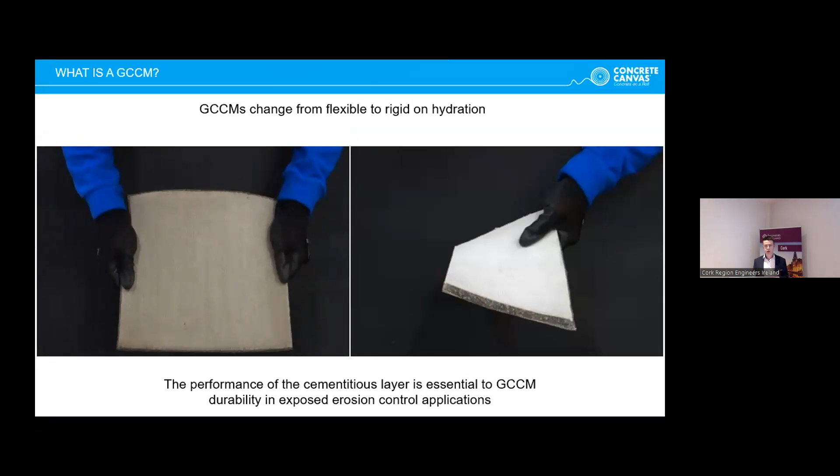But I thought I'd start the presentation off with an introduction into what is a GCCM. A GCCM stands for a Geosynthetic Cementitious Composite Mat, or concrete on a roll. It's quite a unique geosynthetic material where its physical properties change from flexible in its prehydrated state to rigid upon hydration. So the following slide is just a quick illustration of how the material performs both in its prehydrated state, as you can see on the screen here in front of you. So it does change from that flexible state to rigid after you hydrate it, and the performance of the cementitious layer is essential to GCCM durability in exposed erosion control applications.

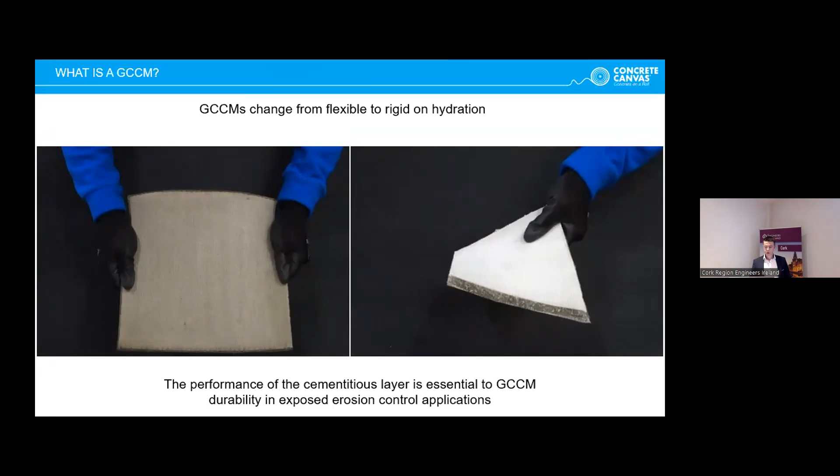There's 4 different elements to a concrete canvas GCCM material. Essentially it's defined as a flexible concrete-filled geosynthetic product that hardens on hydration to form a thin, durable, fiber-reinforced concrete layer. The 4 elements include the polyester hydrophilic top surface, a reinforcing fiber matrix that runs through the material, a dry concrete mix within the material itself, and finally a water-impermeable PVC back membrane. We'll go through each one in further detail shortly.

Just to let everyone know that it's designed for your non-structural erosion control applications, and it's certified by the British Board of Agrément for a durability lifespan in excess of 120 years for your erosion control and weed suppression applications. So there's a long-term durability within the material.

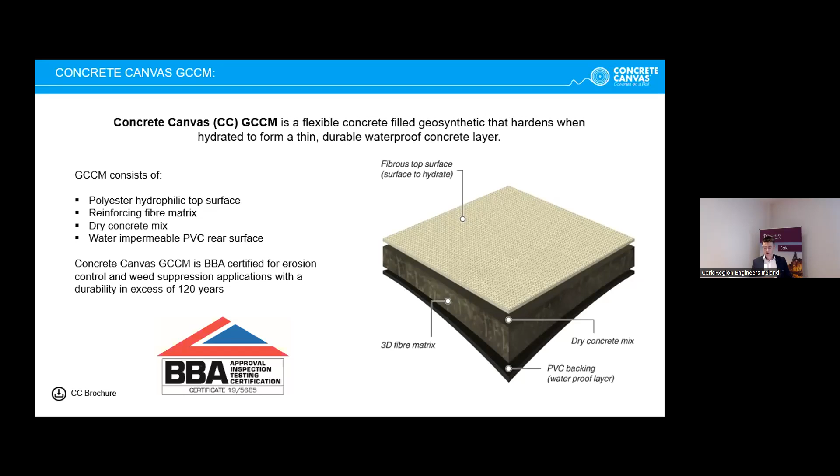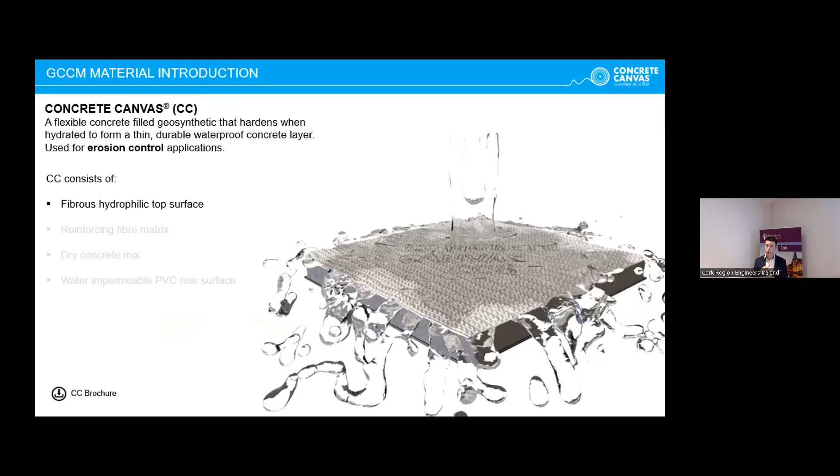So I mentioned the top surface is your fibrous top surface. In the field, this acts hydrophilically. This is the section of concrete canvas that you should hydrate in the field. It wicks in the water very, very quickly, but it's also tight enough to contain the dust and the cementitious fill within the material. So there's a very low washout rate, less than 3% within the GCCM material.

The second component is the 3-dimensional fiber matrix. These synthetic fibers, as you'll see in the slide here, run in a Z fashion through the material, and they're a very important element of a GCCM product. They perform 3 different functions. Firstly, they prevent dislocation of the cement fines. So even if you hang this material on a vertical plane, perhaps for protecting the slope, it still maintains its uniform density. It also prevents any crack propagation after the material has set in the field. And thirdly, it contributes to the ultimate tensile strength of the material as well.

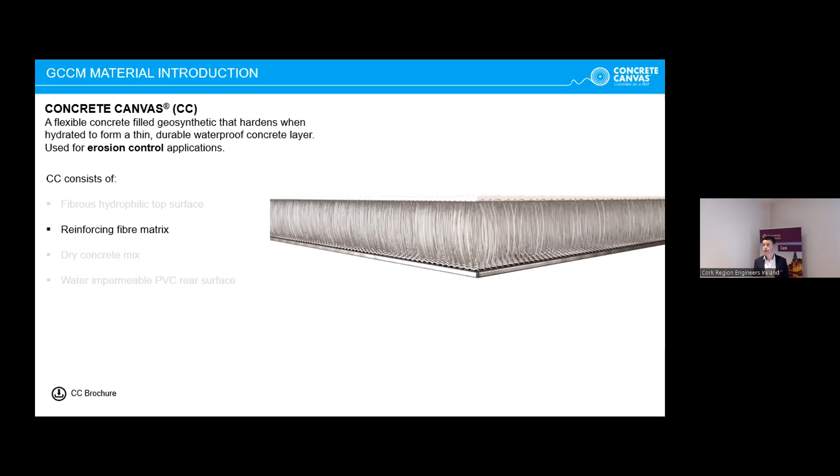An important component. The third element is the actual dry cementitious powder mix itself, which has a very high early strength gain. It gains 80% strength within 24 hours, and it has a 28-day compressive strength of 60 MPa for the middle thickness or type 2 material.

And then finally, on the bottom, we have a PVC rear face, which is your geosynthetic component, and everything in the GCCM, the concrete cementitious component, is designed to protect this from any damage in the field. So that is your back component that should be protected by your overlying concrete material.

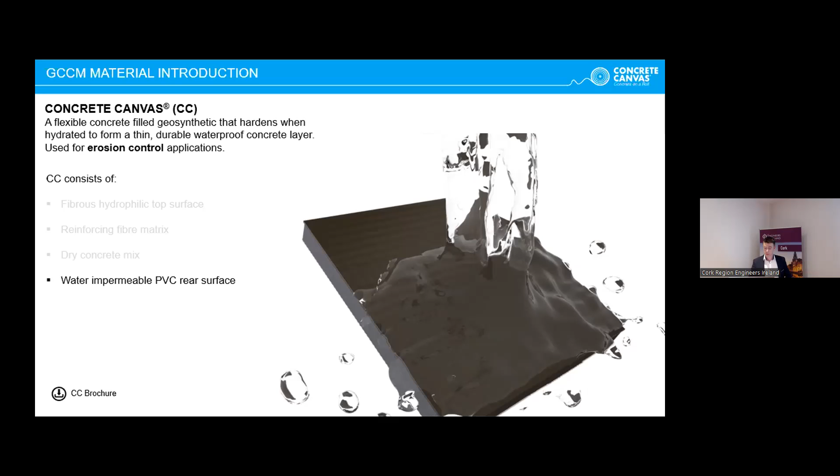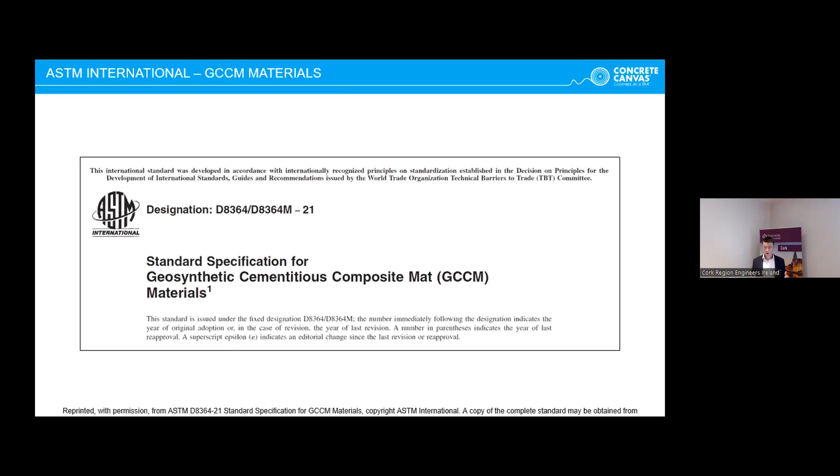GCCMs might be a new term for some people, but it's recognized by the ASTM International Standards Organization. There's now a number of GCCM specific standards covering this class of construction material, from material sampling, testing and installation. But the most important standard, particularly for designers working on civil projects for erosion control needs, is ASTM D8364, the standard specification for GCCMs. There's further details on that standard coming up.

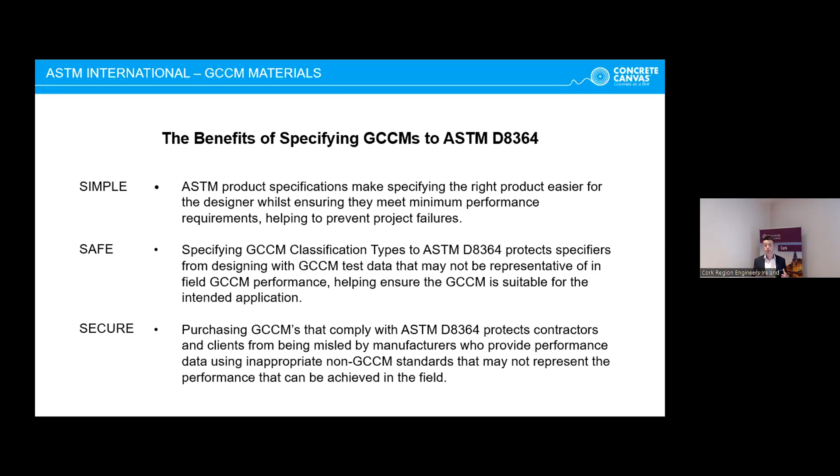Overall, the benefits of specifying GCCMs to ASTM D8364 for designers: a really simple process, detailed, simple, safe, and secure. This means that if you're designing a project to the relevant ASTM standard, you're ensuring you're specifying the right product and meeting the minimum performance requirements. In terms of in-service performance in the field, it's safe, with relevant data and testing. And secure means the contractor knows they're procuring the correct material in the market. It's a really good way for QC for designers on projects.

In terms of the core application areas for the materials, there's 4 key application areas: watercourses, slopes, weed suppression, and containment structures. In the presentation today, I'm going to focus mostly on watercourses, slopes, and weed suppression, but keep in mind that all of these different applications can be used and designed with GCCMs.

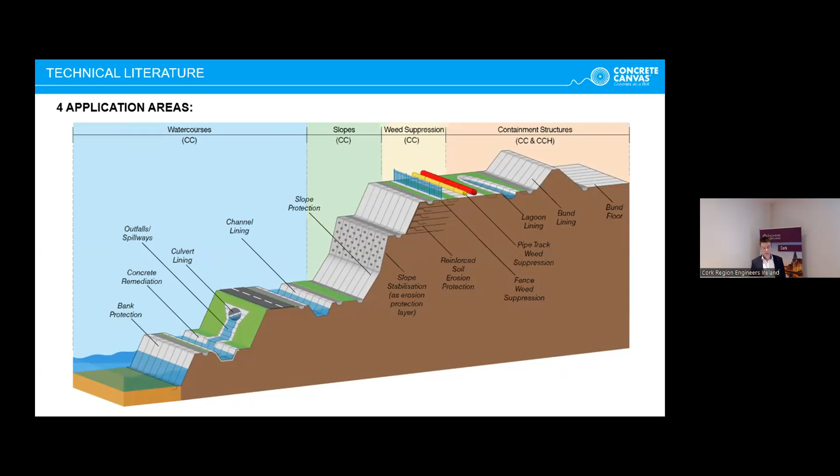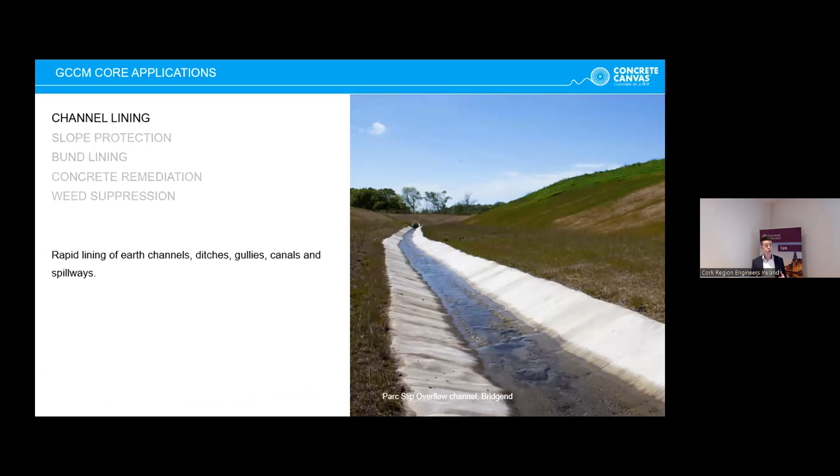In terms of the actual core applications, the first is channel lining. This involves the rapid lining of channels, ditches, gullies, spillways, and canals. The GCCM material tends to be very quick to install, up to 10 times quicker than traditional hard armor solutions such as poured concrete. There are other applications such as slope protection.

Keep in mind that GCCM is designed to prevent further weathering of a slope and further erosion. It's not for slope stabilization. However, it can be used in conjunction with soil anchors and a wire mesh to give it that stabilizing effect.

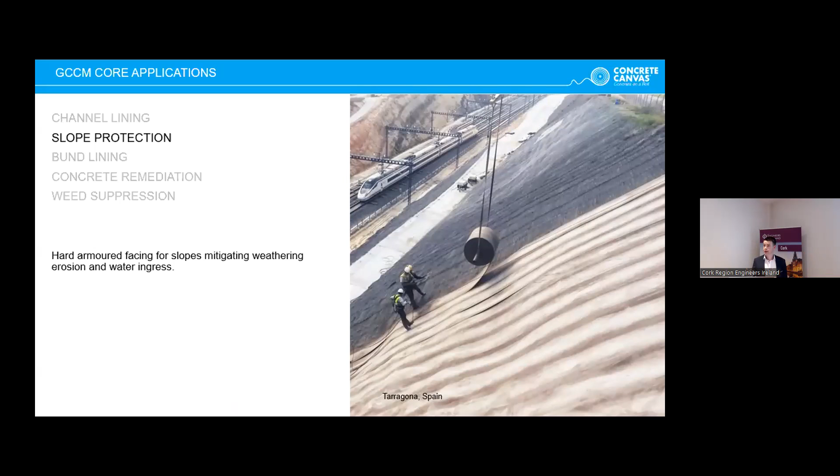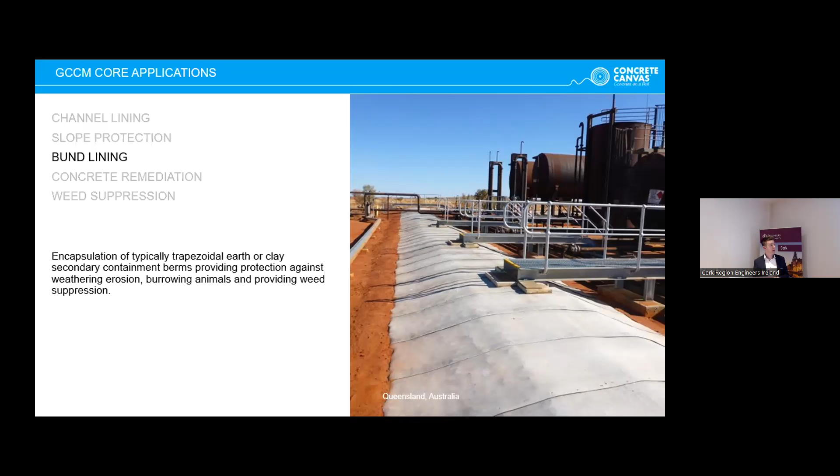The third application is bund lining, which typically involves the encapsulation of a trapezoidal earth bund, providing protection against burrowing animals, perhaps for containment on certain applications in the petrochemical sector, and ultimately for weed suppression on different plants.

Concrete remediation is also a popular application of GCCMs. Typically, clients have existing assets coming to the end of their design life and wish to prolong that design life using a GCCM. The material can be put into service within 24 hours because of the high early strength gain concrete used, and it has a very thin footprint, which allows them to preserve volume capacity within a flume or a watercourse.

And finally, it can be used for weed suppression, typically underneath security perimeter fencing, underneath access points in the rail and road sectors, or for line of sight crossings in different areas in the rail sector as well.

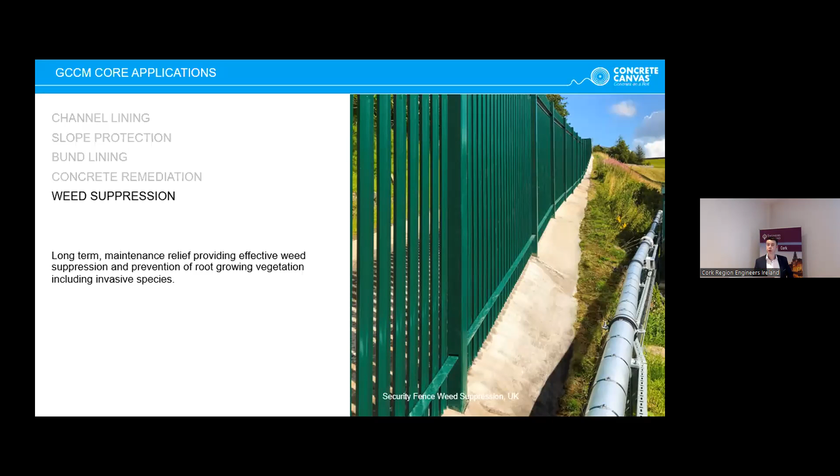We'll have some case studies later in the presentation going through some of those applications, but keep in mind it's quite a versatile material, GCCM, and it can be used for alternative applications such as culvert repair and gabion reinforcement. There are other applications out there in the market too.

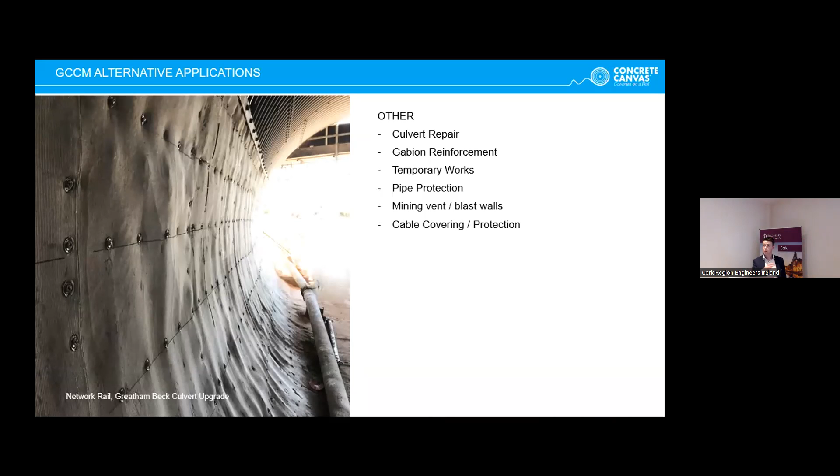They weigh up to 70 kilograms per roll, and need a 2-person lift for each roll. You can simply install it with hand tools and a water source. You don't need heavy plant to install the batch rolls.

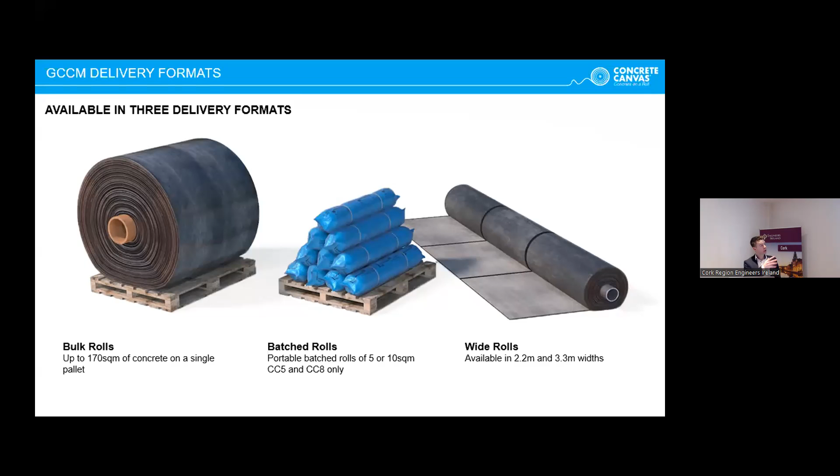Finally, we have our wide rolls on the right-hand side, available up to 3.3 meters wide. Keep in mind, the wide roll is ideal where you have a straight uniform channel of constant profile, or a larger project or slope where you want to minimize the amount of joints required in the field. But again, for the wide rolls, similar to the bulk rolls, you do need good access and heavy plant for deployment.

All formats are delivered in the same fashion, palletized and in shrink-wrapped plastic packaging, as you can see in the photograph here. The shelf life for a GCCM is 2 years from manufacture, simply because of the cementitious build within the material. Keep in mind, if a contractor is storing this outdoors before installing the material, we typically recommend putting additional tarpaulins over it to keep water out.

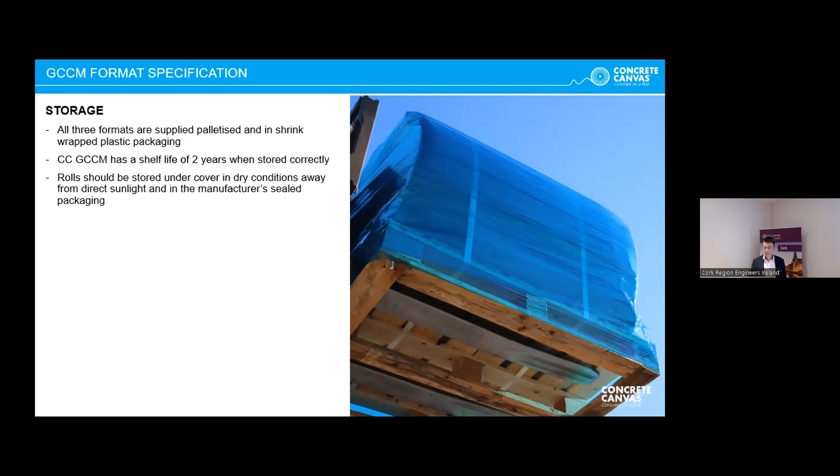So you can see the bulk roll in action on the left-hand side with the spreader beam being deployed from an excavator on site. In terms of physical properties of the material, there are 3 different strength classes for a GCCM: Type 1, Type 2, and Type 3. You can see here the thicknesses change depending on the type - 5 millimeter, 7 millimeter, and 11 millimeter. Keep in mind that the size of the rolls will get smaller as the material gets thicker, simply to keep it within the weight range for deployment.

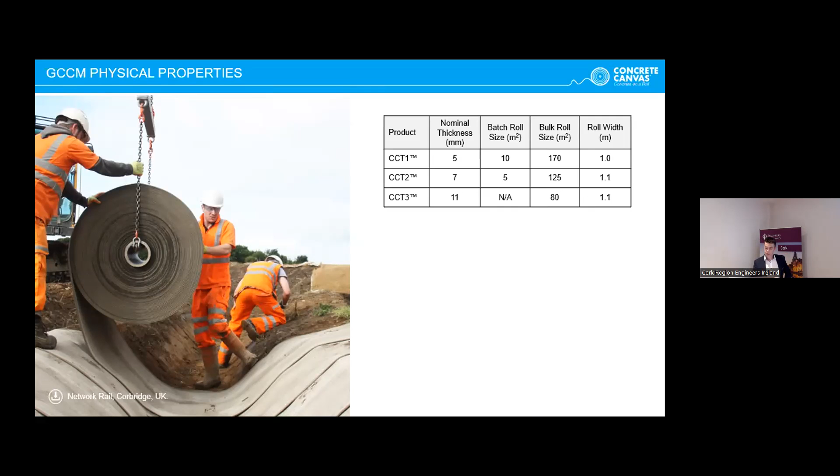In terms of classification of GCCM materials by application, as I said, we have 3 different types. Type 1 is the 5 millimeter thickness, and this is typically used where you have low shear stress and low velocity applications with limited traffic - the likes of slope applications, as you can see in the photograph here, but also weed suppression, berm protection, and the remediation of concrete hydraulic structures.

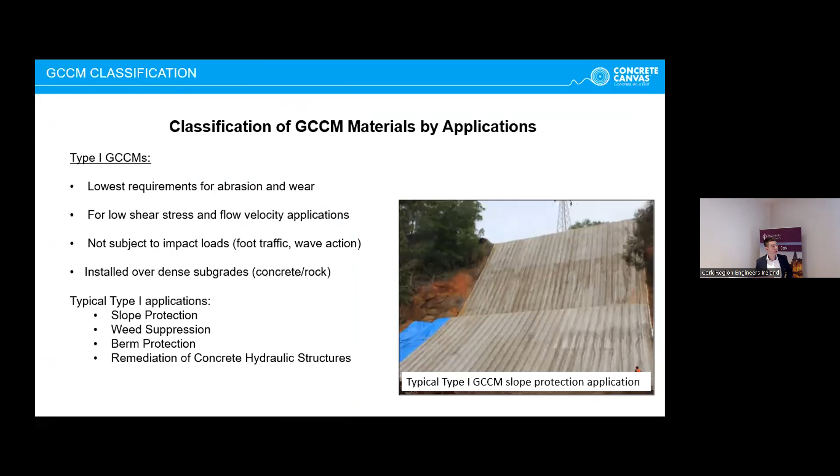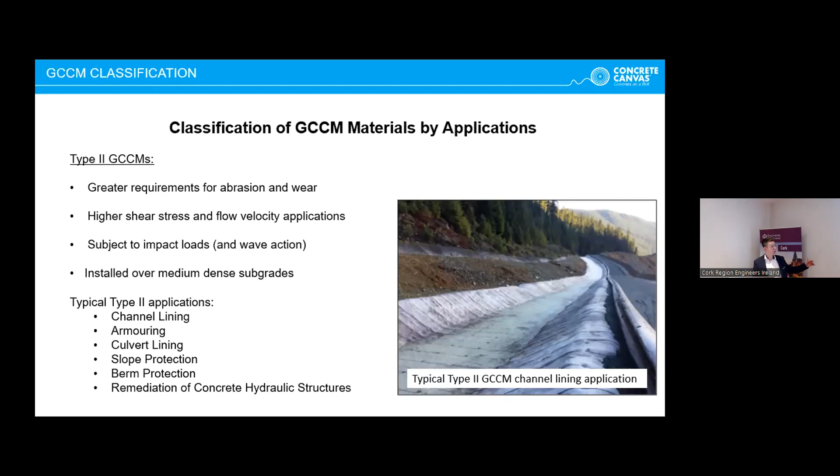For the Type 2 material, this is typically used for hydraulic applications. As you can see from the photograph here, for the likes of water courses, we'd recommend the Type 2. It can handle higher shear stress and flow velocity applications, and this can include everything from channel lining, culvert lining, and berm protection, depending on the project.

Then there's Type 3, which is 11 millimeters thick. Again, this can be used for similar applications, but perhaps you have a looser subgrade or higher abrasion or wear requirements on a particular project. Type 3 bulk rolls tend to be slightly less, at 80 square meters per roll, but you have your 11 millimeters thickness per roll.

I mentioned at the start that a GCCM is quite a unique product where the actual physical properties change from flexible to rigid on hydration, and the data sheet reflects this. So you can see here in the preset concrete canvas property data sheet, it covers everything from thickness and roll size, which we've just gone through. But if you look at the bottom of the screen, there's also the savings in terms of embodied CO2 using GCCMs compared with traditional concrete, which we'll go through shortly, and also the working time from hydration, which is 1 to 2 hours.

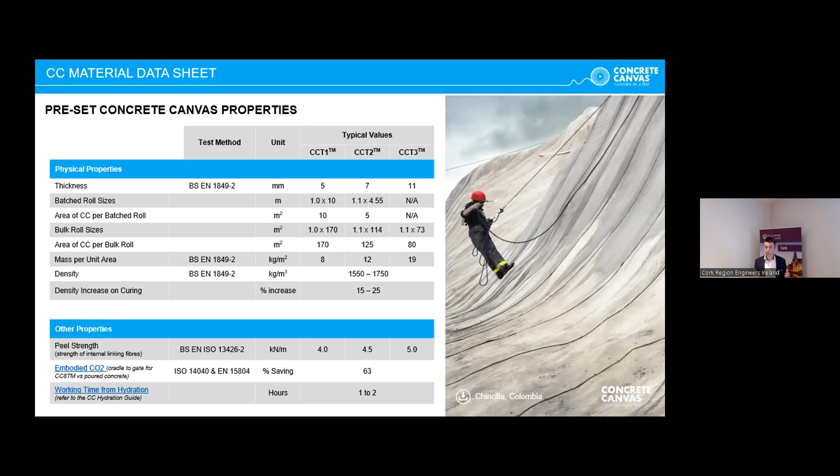That's a key thing to keep in mind, particularly with our climate in Ireland, where it's usually raining when you're installing this material on site. There is that working time of 1 to 2 hours before the material begins to set, so typically there are no delays due to rainfall.

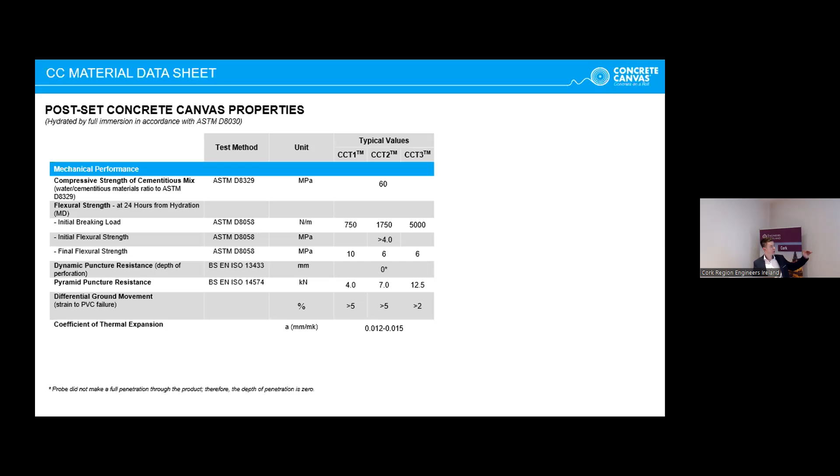This leads us into the British Board of Agrément durability certificate I mentioned at the start. The durability lifespan of this type of material is 120 years for exposed erosion control applications. That's downloadable online, but some of the factors they assess are the durability, climatic performance, and structural performance of the material for a range of erosion control and weed suppression applications.

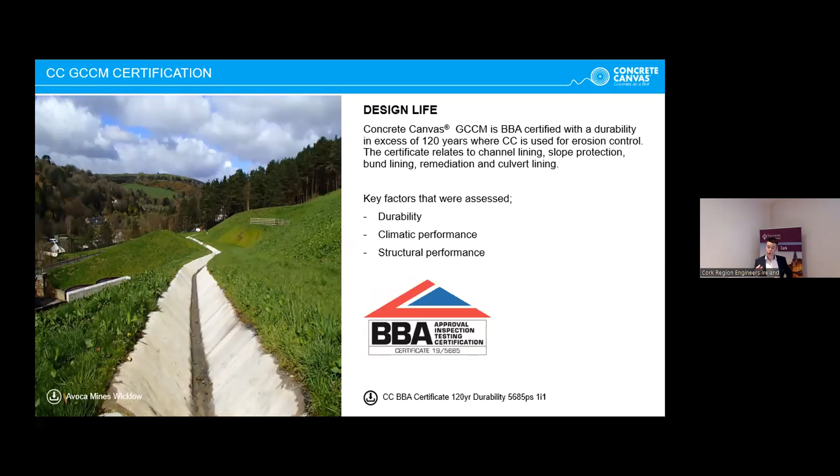Before I finish off on some of the technical literature of the GCCM and move into some case studies in the region, I thought I'd give a quick snapshot of some of the reasons GCCMs can be designed and specified on projects.

As I mentioned at the start, it's quick to install, up to 10 times quicker than conventional concrete, but also keep in mind it's quicker to commission. Because it gains 80% strength within 24 hours, you can typically put that asset back into service within 24 hours. There's also lower project costs, both from a material standpoint and from the speed of installation and the savings associated with that, and it can be installed under adverse weather conditions.

The durability, as I mentioned, is in excess of 120 years, and the abrasion resistance of the material in hydraulic applications is similar to 70 MPa concrete. Also keep in mind the reduced carbon footprint of the material.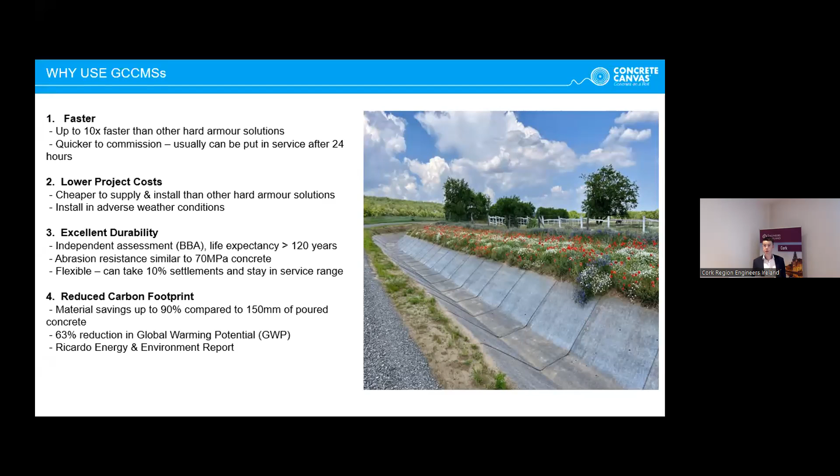For a lot of applications such as channel lining, interceptor channel lining, or ditch lining, concrete canvas GCCMs will replace up to 150 millimeters of poured or precast concrete. So right away, if you're using the 7 millimeter thickness of GCCM, you have 90% material savings. That associates with a 63% reduction in the embodied carbon or global warming potential using this material. We'll have a couple of slides coming up on that.

There was an independent report recently released from Ricardo Energy and Environment, which we'll go through shortly. Keep in mind that a GCCM product has a very low alkaline reserve and a very low washout rate, so typically it doesn't affect the pH levels in the water once you've installed and hydrated the material. For that reason, it's been approved by the EPA, the Environment Agency, and in this slide, the Natural Resources Wales in the UK, where they directly installed the material for this salmon hatchery plant for ditch lining.

You'll notice on this slide that there's algae and moss buildup on that hydrophilic top surface. So while it's still preventing any root-growing vegetation coming through the material, it will have a buildup and mossing effect, so it will blend in better over the long term.

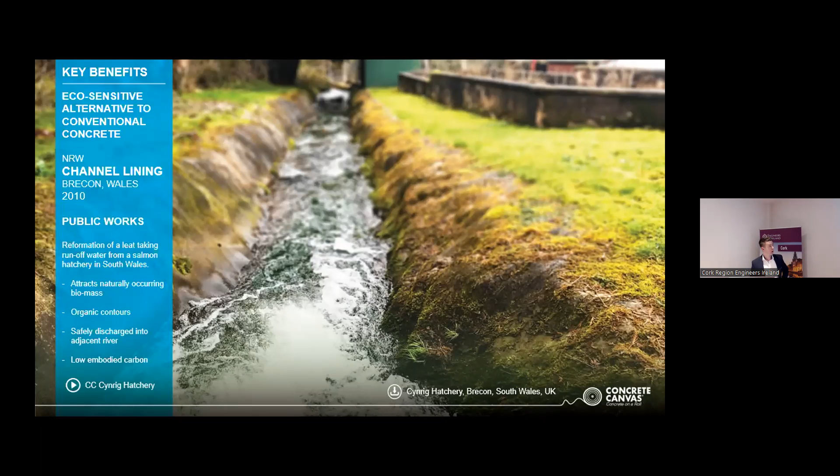Again, in terms of the life cycle assessment of the material, Ricardo Energy in their report ran this LCA, and basically, for people who aren't familiar, it does a cradle to grave assessment. It includes everything from sourcing your raw materials to manufacture, transportation, installation, and end of life.

When they ran the report, they found that the global warming potential of a GCCM product type 2 is 63% lower than 150 millimeters of poured concrete. You can see on the table on the right-hand side all the different points they've taken into consideration. This is a really useful tool for a lot of the designers looking to work with GCCMs.

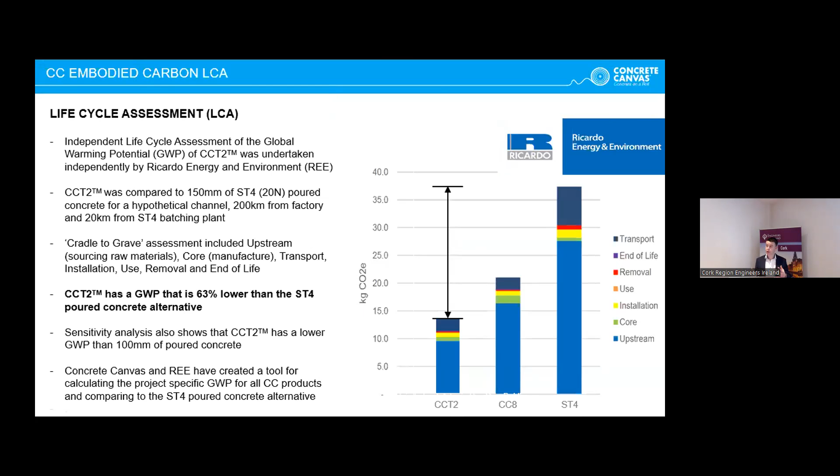Part of the report was also an interactive carbon tool. You'll see on this slide on the top left-hand side, the carbon tool allows designers or clients to input all the data for a particular scheme or project, and it can compare a GCCM product with an incumbent poured concrete or hard armor lining solution, and it can actually factor in what the exact carbon savings is on a particular scheme.

A key thing to this is obviously location of the project. You can see on this particular scheme from Birmingham and Spaghetti Junction, which was a Network Rail and National Highways scheme headed up by the Environment Agency, they replaced the incumbent solution, which was 150 millimeters of poured concrete, with a type 2 GCCM specification. On this particular scheme, there's a 66% reduction in the global warming potential. That's just an example of where the tool can be used.

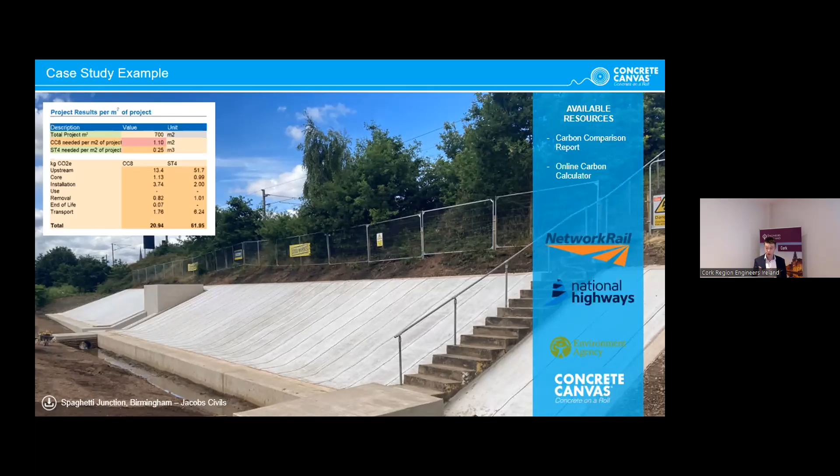We all encourage that it is used on schemes in the UK and Ireland.

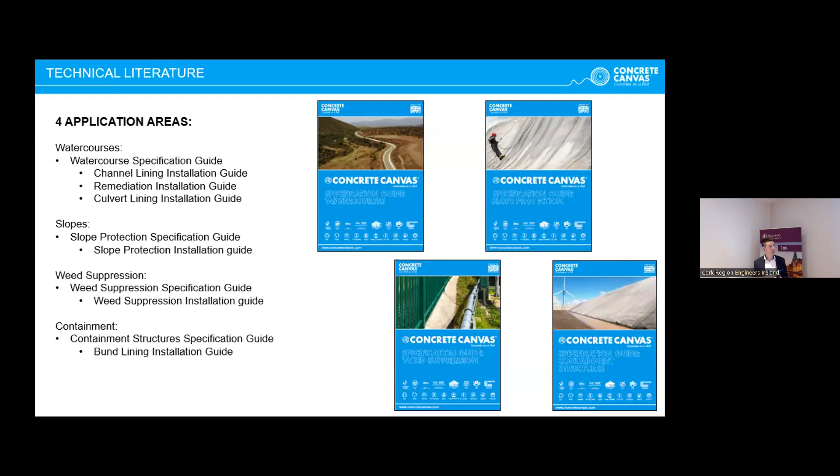In terms of the application areas for GCCMs, I mentioned earlier we have our watercourse specification guides, slope protection specification guides, weed suppression and containment specification guides. This is a really useful tool for designers when they're trying to incorporate all the important data into one of their designs. To simplify this, the next slide shows 4 key installation principles for a GCCM product. This is something that should always be taken into consideration when designing a project with a GCCM, and should also be taken into consideration by the contractor installing the material in the field.

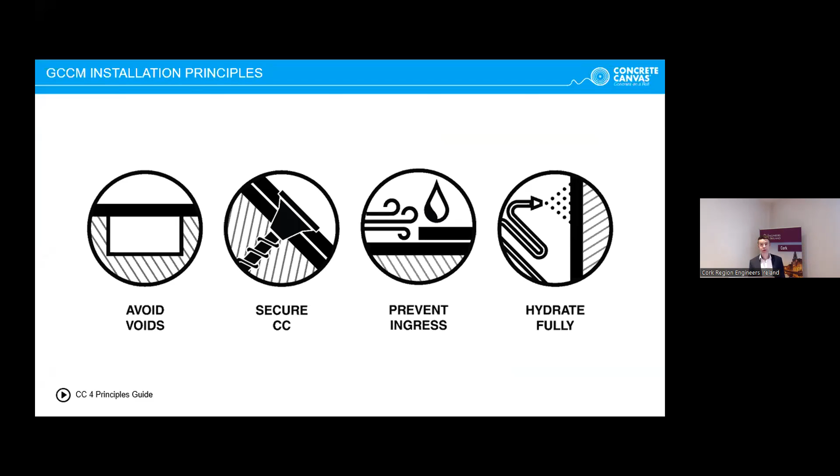The first key installation principle is to avoid voids. This typically means laying the material onto a geotechnically stable substrate. As you can see in the photograph here, that means it's relatively smooth and uniform, free of any sharp rock or protrusions, which should be removed prior to laying the GCCM product. On some projects, we'll also recommend a geotextile, depending on the project. Keep in mind that's a key consideration before you lay the material.

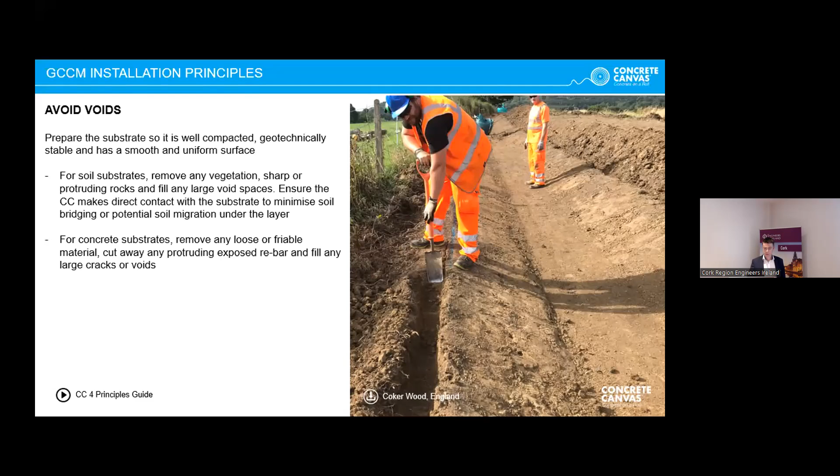The second installation principle is securing the material together. Typically, we recommend overlapping the layers by 100 millimeters, shingled in the direction of water flow, as you can see in the cross section on the left-hand side, and mechanically fixing the joints together at 200 millimeter centers with 30 millimeter stainless steel screws. This gives you a high mechanical strength joint, but at the same time allows water from underneath to drain out through the joints if there's a high water table, preventing hydrostatic uplift pressure. So that's a really good joint detail.

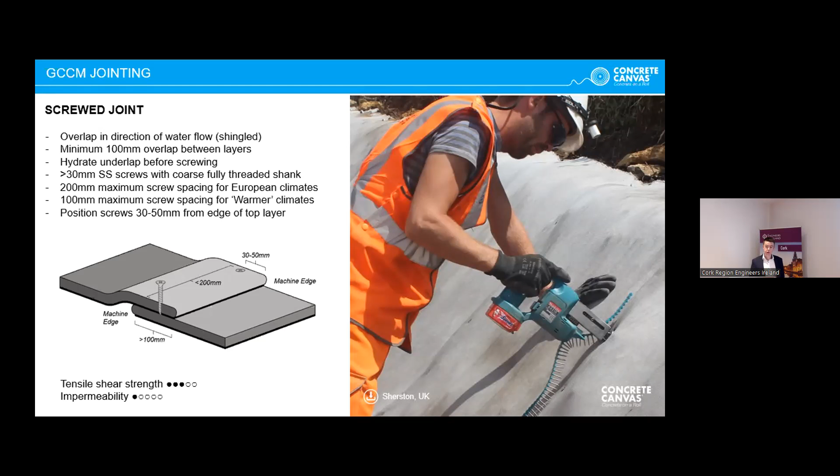The screw should be 30 to 50 millimeters from the edge. You can see on the right-hand side here, typically an auto-fed screw gun is used in the field to apply the screws quite quickly.

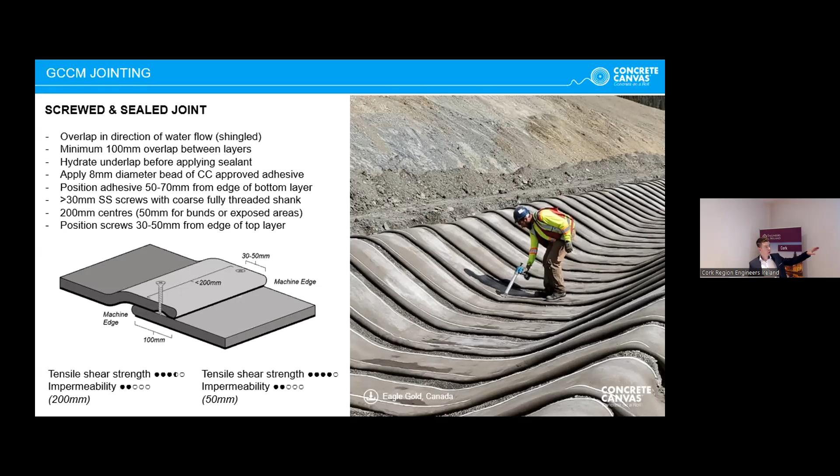If a high water table isn't an issue on site, and if you want to improve the impermeability of the joint, you can add a sealant underneath the overlap. Typically the sealant is applied, as you can see in the photograph here, 50 to 70 millimeters from the edge. After it's been hydrated underneath, you flip over the top layer and screw through that sealant, which bonds around your screw. That will still give you a high mechanical strength joint, but also improve the impermeability of the joint in the field.

In terms of edge fixings, which is also a key consideration, to join the material to the substrate it's typically recommended to use 250 millimeter galvanized pegs, as you'll see in the top right-hand photograph. This is pegged through each overlap within an anchor trench, which can then be backfilled after it's been hydrated. You can see on the left-hand side some of the design features: the anchor trench should be a minimum of 150 millimeters in depth, and should always be backfilled with non-erodible material. That may depend on whether there's a flow of water over the anchor trench — it may be a poured concrete backfill, or simply site-won material, depending on the flow.

There also might be a requirement for intermediate fixings, depending on whether there are high hydraulic shear loads within a channel. This is a project I worked on 8 or 9 years ago in Canada, at Myra Falls, where they used earth percussion anchors at 1 meter intervals because of the high shear loads within the channel. This project was designed to handle flow velocities in excess of 20 meters per second. So intermediate fixings are typically only required when you have high shear loads within the channel itself.

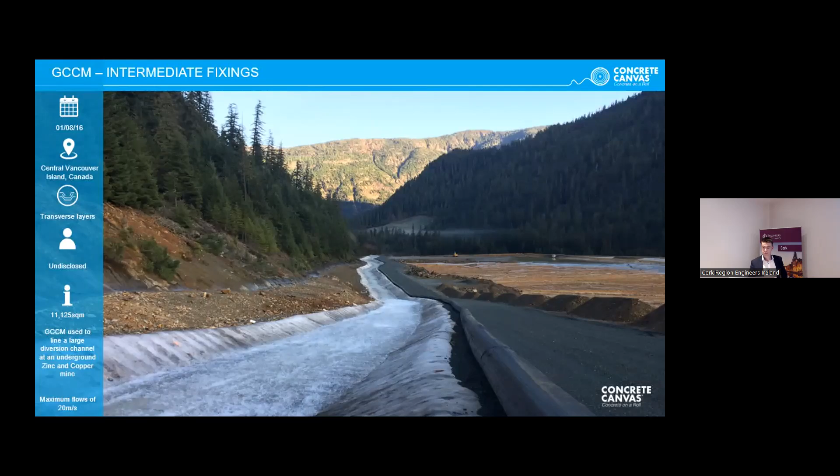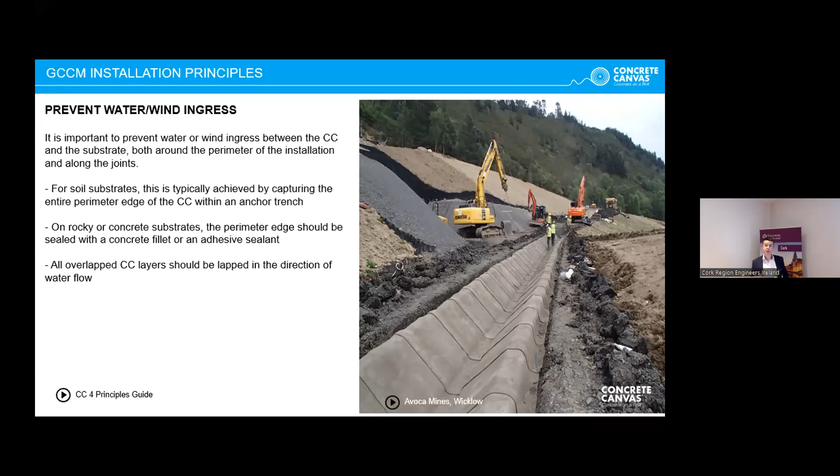The third installation principle is preventing water or wind ingress around the perimeter of a GCCM installation. On the right-hand side is a project from the Avoca mines in Wicklow, where they dug a 250 millimeter anchor trench prior to backfilling with non-erodible material. This is a key consideration for any design, because you don't want any water or wind getting underneath an installation. The leading and trailing edges are typically installed into an anchor trench and backfilled with poured concrete to prevent any ingress.

The final installation principle, probably the most obvious, is to actively hydrate the material at the end of each day. A GCCM cannot be overhydrated — you can use an excess of water, since we control the water-cement ratio within the material itself. However, you typically require half the weight of the material in terms of the volume of water. In this photograph from a road scheme in the UK, they were using a type 2 GCCM, which weighs 12 kilograms per square meter, so you'll need approximately 6 liters of water per square meter. If conditions or temperatures are above 25 degrees Celsius, you may need more water, or may need to rehydrate an hour later. However, in Ireland, we typically don't have those conditions in the field.

A key thing is to remember to actively hydrate it at the end of each day. From the contractor's perspective, they should always allow a couple of hours at the end of each day to make sure they actively hydrate it.

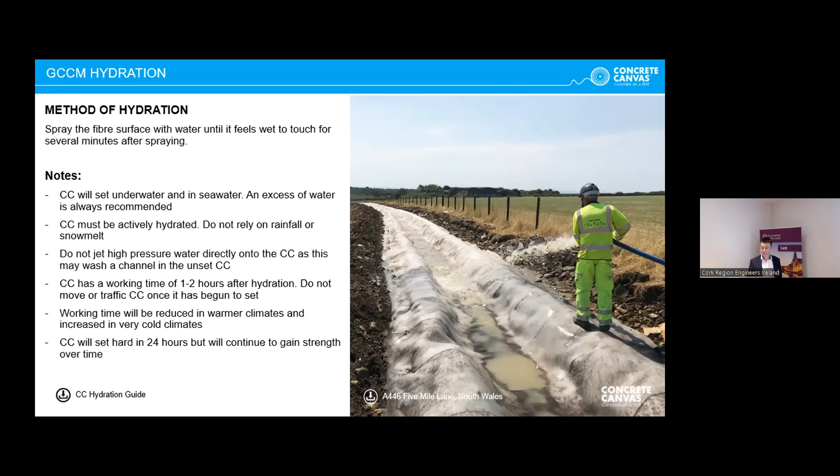That leads us to the end of some of the technical details of a GCCM product. I thought I'd spend the last half of the presentation going through some case studies locally here from the south and southwest of Ireland. I mentioned at the start that watercourses and channel lining is a core application for GCCM, so most of the focus is on this type of application.

I thought I'd start with the most local project in Cork, the recently opened Macroom bypass. It's a €250 million scheme, the Macroom to Ballyvourney works. Concrete canvas GCCM was specified by Barry Transportation on this scheme for one of the watercourses being diverted during the works, and it was installed by the John Craddock and Jons Civil joint venture.

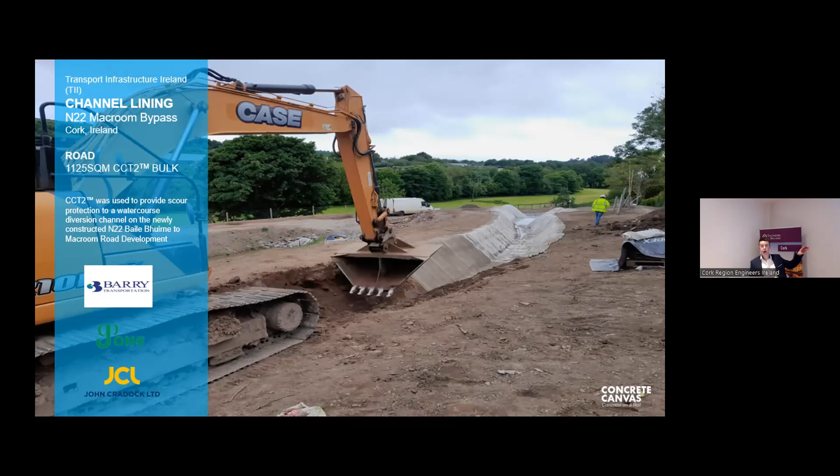They specified a type 2 GCCM for this scheme on quite a steep one-to-one side slope in the watercourse channel. It had a 1 meter base, and you can see the steepness of the side slopes. There was also significant curvature within the channel itself.

For that reason, we recommended a transverse layup in this scheme, overlapping the layers by 100 millimeters in the direction of flow. A transverse layup allows you to accommodate any curvature or pipe protrusions or inlet drainage pipes, and you'll see some of the photographs coming up on that.

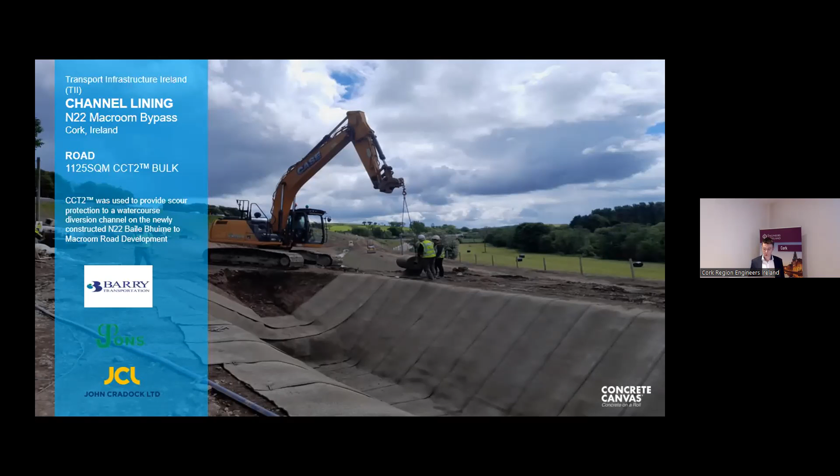They used the bulk rolls, as you can see in this photograph, with a spreader beam deployed from a 13-ton excavator. There were a few steps within the watercourse itself to dissipate some of the water energy as it moved downstream. This gives you a good idea of how steep that side slope is, and the 1 meter base within the invert.

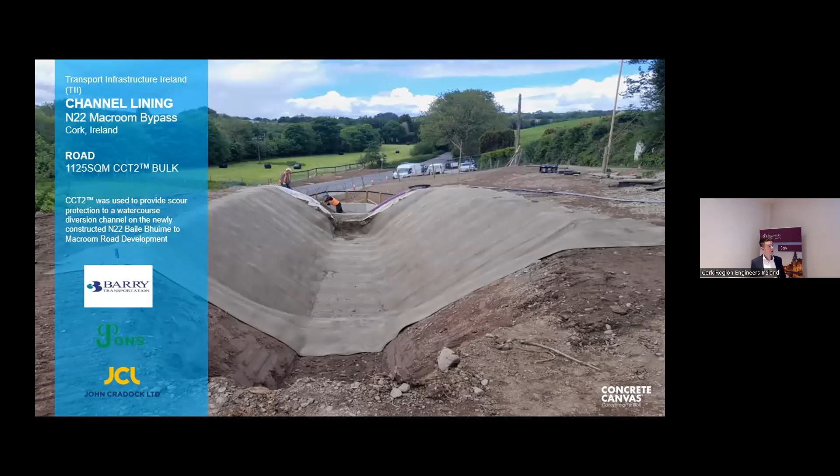All the material was laid out prior to fixing it to the substrate with 250 millimeter galvanized pegs within the anchor trench. After installing the pegs and screwing the overlaps, all of the material was hydrated prior to any backfill. You'll notice here a stilling basin, essentially a deep section of the diversion channel, used to dissipate some of the hydraulic jump within the channel itself.

The water runs through the culvert underneath the newly constructed dual carriageway into the stilling basin, then flows downstream for 150 linear meters. Just over 1,100 square meters of type 2 GCCM was installed.

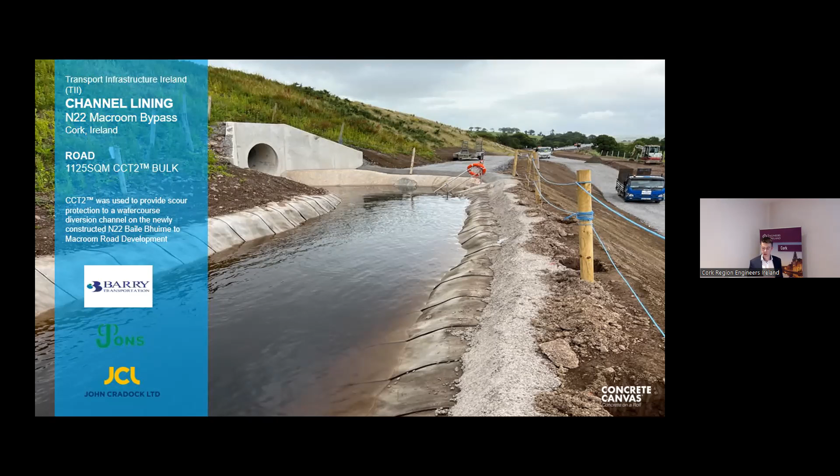As I mentioned earlier, the non-erodible fill was Site 1 material on the left-hand side, but on the right-hand side they used poured concrete because there was a risk of water getting underneath on that side. So keep in mind, depending on the erosion requirements, we may recommend poured concrete or just Site 1 material for the anchor trenching. That's the final photograph from the N22 scheme.

You'll notice a 700 millimeter HDPE drainage pipe coming into the section of channel with quite a bit of flow. Again, that transverse layout worked really well in terms of accommodating the curvature, as you can see in the background of the channel. That road scheme is open now and operating, and you can see it if you're ever driving on that section of road.

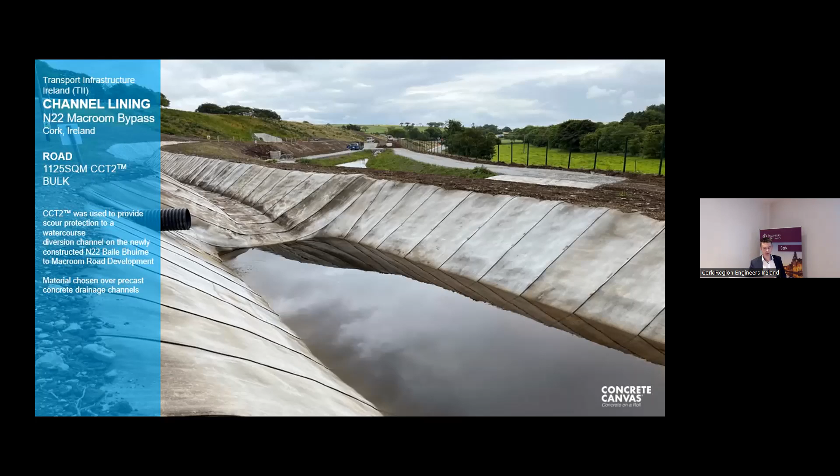Similar to the N22 scheme, we recently worked on the Killaloe bypass, which was work specified by RPS Group in Cork, with John Sisk and Son as the main contractor. This was a really interesting project, and we were in touch with the designer last summer.

As people will remember, last June was one of the driest months on record, followed by one of the wettest months on record in July. Typical Irish weather, but to an extreme this time. You can see from that very dry weather to very wet weather, the amount of scour and erosion within the invert of that interceptor channel.

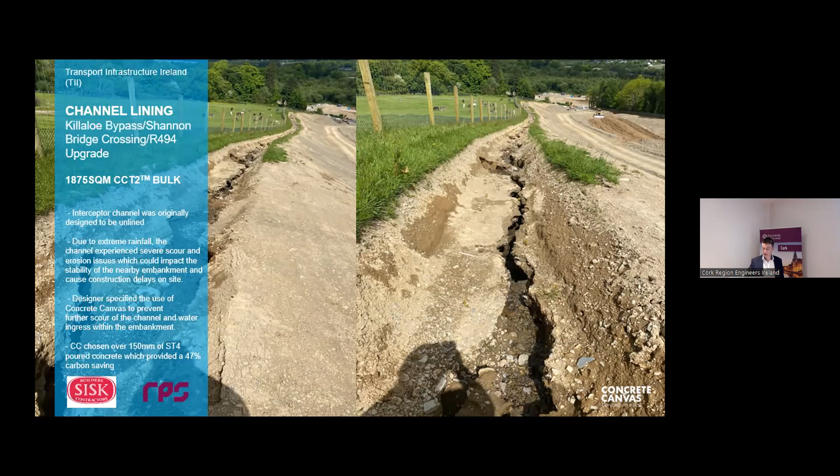The risk here is the stability of the slope on the right-hand side because of that water ingress. If there are any issues there in terms of slippage, you're going to have construction delays on site. So it was decided that it required a hard armor lining solution, and they needed material quickly on site.

So the GCCM worked well. On one truckload, they were able to deliver 2,700 square meters of material on just one articulated truck to site.

Similar to the Macroom bypass scheme, John Sisk and Son used a transverse layout, again due to the steep gradient within the channel and the curvature, and again using a spreader beam for deployment into their anchor trenches.

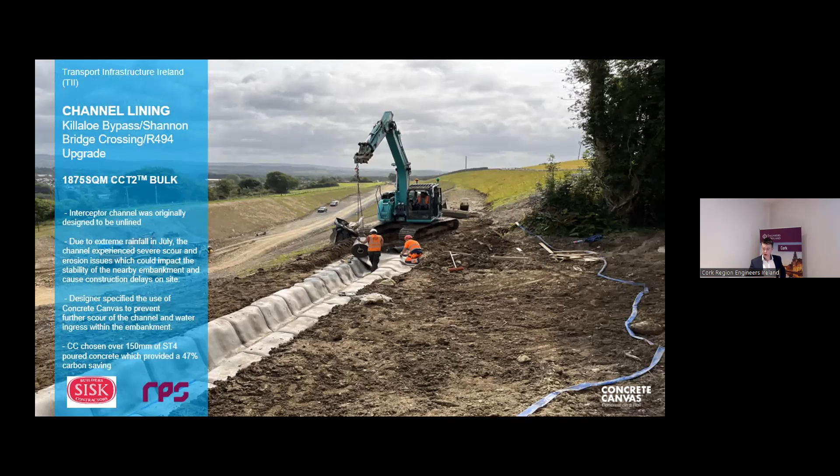They hydrated the material and applied the stainless steel screws at 200 millimeter centers along each overlap, as you can see here. And then they hydrated the material after it was all screwed and pegged into place.

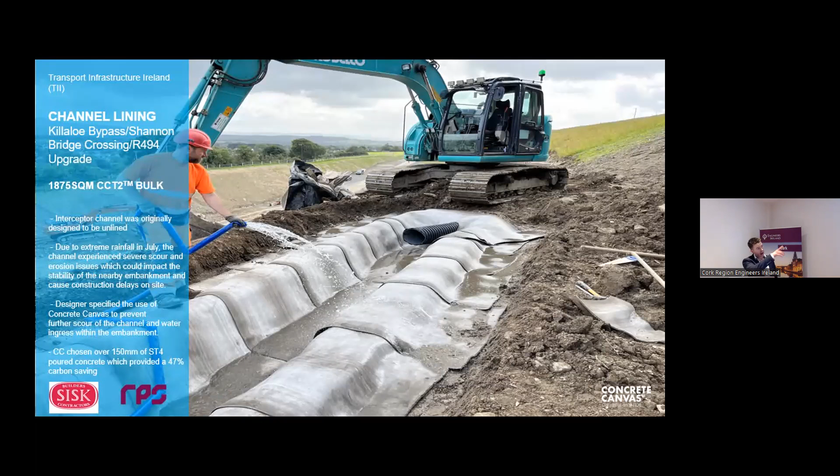So a very similar layout, and it was able to accommodate the head wall, as you can see on the upstream section of works, the GCCM material, and then they backfilled with material.

You can see during the construction and installation of the concrete canvas in the channel, the amount of water and saturation on the right-hand side of the channel there. So even during those works, they were still getting a lot of rainfall on site. Thankfully, that didn't result in any delays with the material.

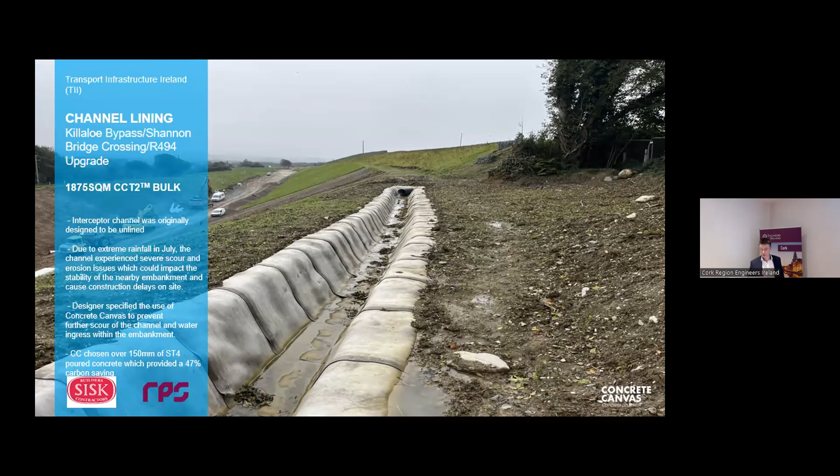I think this probably gives you a better appreciation of the curvature and the steep gradients on some sections of the interceptor channel. You'll also notice a drainage pipe on the left-hand side in the foreground, and that was carrying a small stream from a wooded area into that interceptor crest drainage channel. So it's quite a bit of flow, not only from the rainfall, but also from that stream as well, entering the location of the channel.

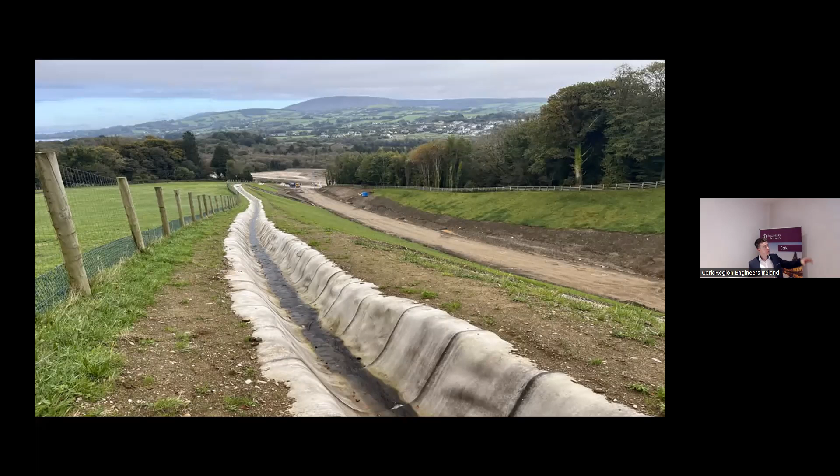So again, just shy of 2,000 square meters installed in certain sections, over 3,000 square meters in total along the steep gradients. And that's been in place now for just over 5 months.

Similar to the two applications I've just shown everyone, GCCMs have been installed for up to 8 years now in Ireland. This is one of the oldest schemes installed, at the Avoca mines in Wicklow. This was designed by CDM Smith in Dublin, with work carried out by Priority Construction on site.

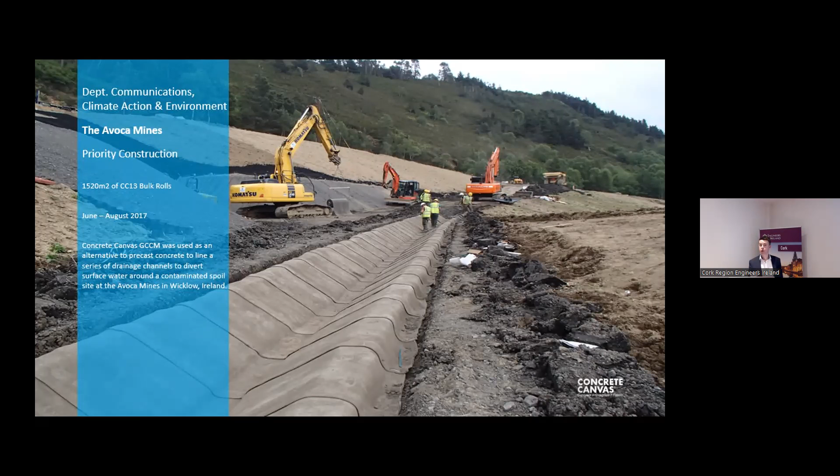So you'll notice for that reason - it was a bit difficult to see in the background - they applied a sealant underneath the overlap. The reason for this was to improve the impermeability of the joint, so the water is not in contact with any contaminated soil.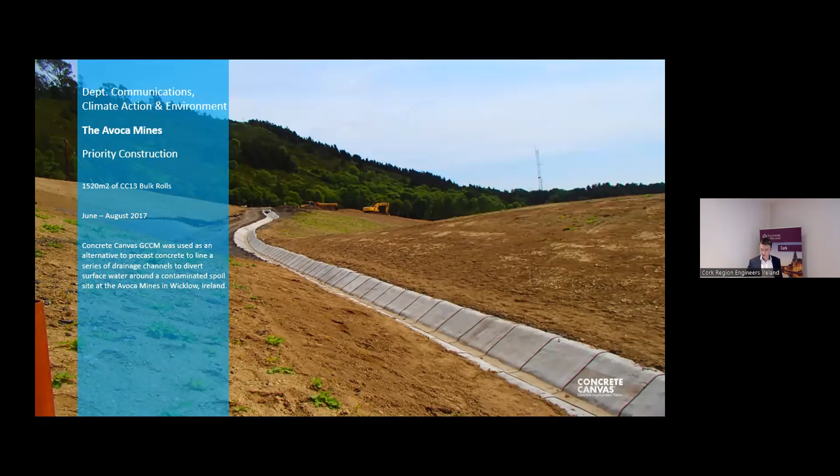I was on site during the works on this particular scheme, and this was a photograph after it was finished, again with quite a bit of curvature on this particular channel. Then a couple of years later, this was the finished scheme.

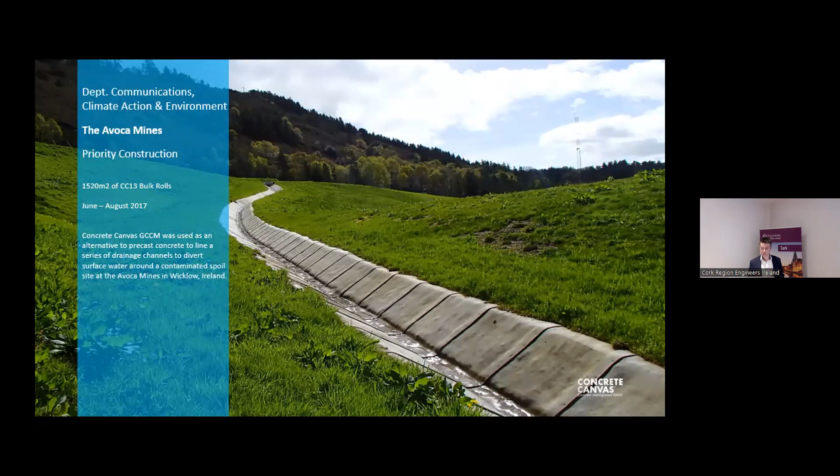So again, the GCCM product is there to carry that clean water downstream into the Avoca River. Looking downstream towards Avoca itself, you can see the GCCM lined channel.

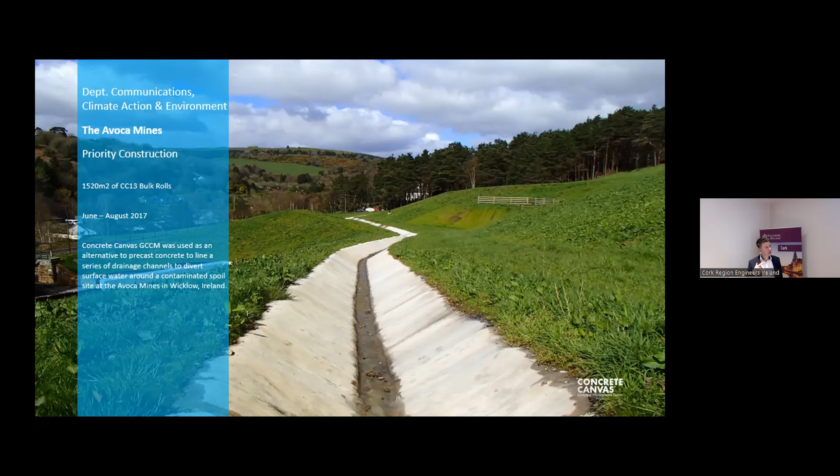So again, for watercourse channels, it tends to be the type 2 material. On that particular scheme, it was actually the type 3, 13 millimeters thickness, that was used, simply because there was more abrasion expected within the actual channel itself.

We're not confined to using GCCMs just for typical soil channels. It can also be used for existing assets, as I mentioned. We've worked with the likes of Irish Water or other utility providers where they have existing assets, whether it's concrete flumes on hydroelectric schemes, as you can see here from a scheme in Scotland with Scottish Power.

You can see that actual concrete flume is in quite good condition considering its age - it's over 50 years old. However, you can see there's weeds starting to grow out through it. There was significant water loss as well, which isn't ideal for the client - they were losing too much water.

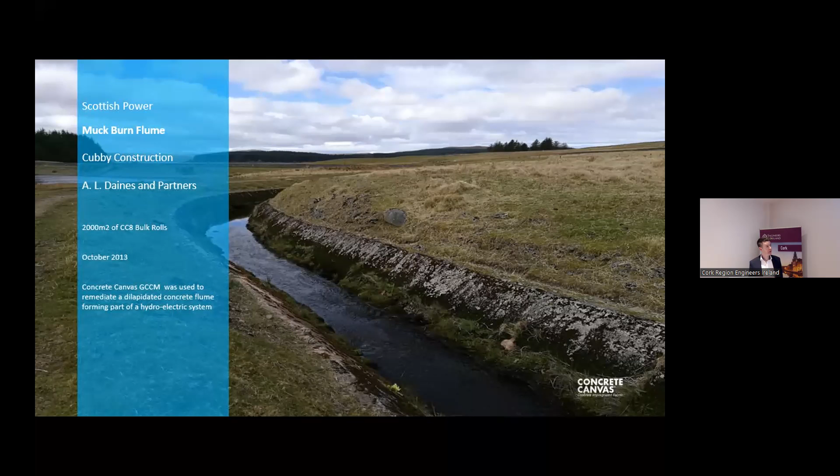They decided to specify a type 2 GCCM product on this, the 8 millimeters thickness. As I mentioned earlier, because of that thin material, they were able to preserve the volume capacity within that flume for the hydroelectric scheme, which is really important for the client. It was also able to be put into operation within 24 hours.

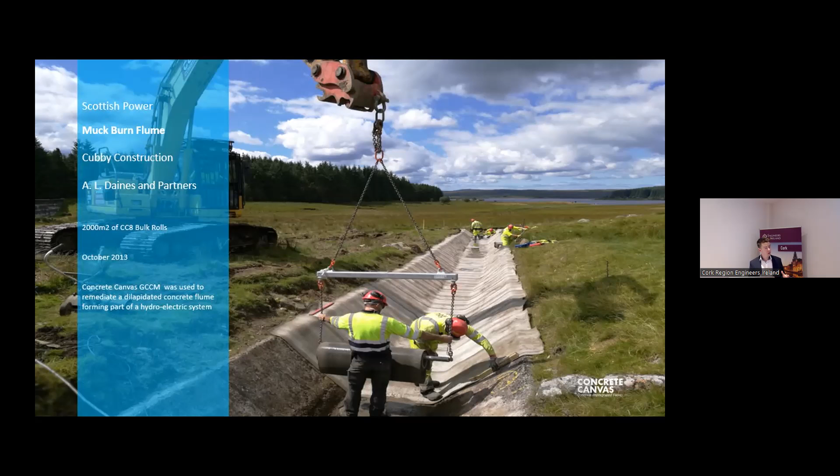You'll have to use stainless steel concrete screw anchors to screw through the overlaps into the actual concrete subbase to get a very secure connection within the asset itself. So there's a few differences depending on what subgrade you're looking to use it for. You might be able to make out on this slide the fixing detail - it's 500 millimeter centers with a concrete screw anchor with a 15 millimeter washer on this particular scheme.

There's also a number of inlet channels it needed to accommodate on the right-hand side, just to bring some water in from that slope. They installed some erosion control matting on both sides of the channel, just to ensure quick germination on both sides of the channel.

This was a photograph from 10 years later. As I mentioned earlier in the presentation, the GCCM material will blend in a little bit better with the surrounding landscape over time, primarily due to the hydrophilic top surface, which has a buildup of algae and moss over time. So you can see that finished project after 10 years.

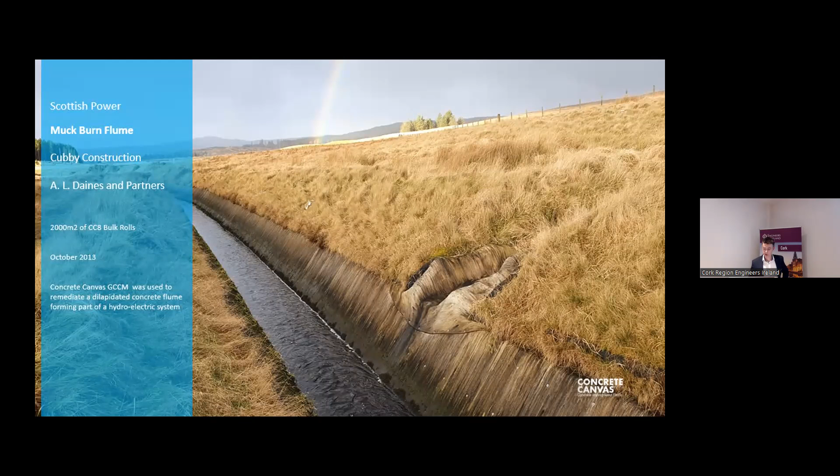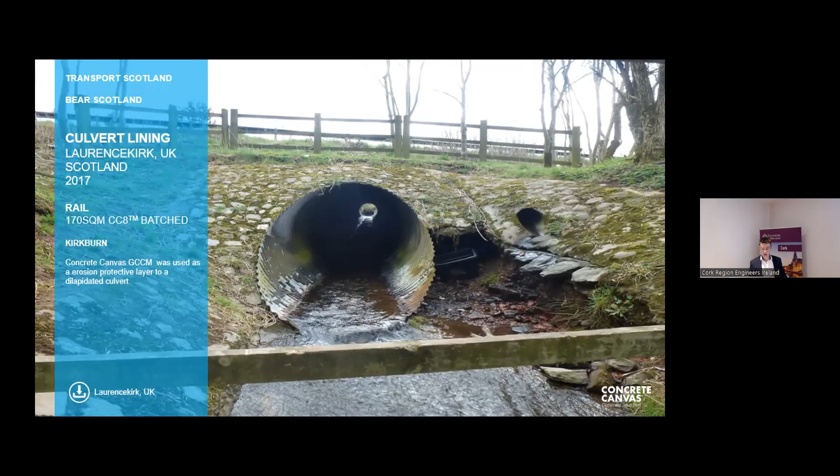Moving into the final application, which is for culvert repair. I thought this was an interesting application to show for GCCMs, again for existing assets, where a culvert, whether it's a masonry culvert or a steel Armco culvert, that's structurally sound, was having issues with invert water loss. You can see here in the invert, the bitumen has actually started to wear away. Due to this, a lot of the water was starting to get through the culvert invert and start to undermine the whole structure. So Transport Scotland on this particular scheme wants to prolong the design life of this structure, so they decided to use a GCCM to line the invert and the side slopes.

You'll notice here that SEPA recommended a large enough pipe to allow fish to go through. So that diverted all the water, over pumped, and this allows a dry working area for the contractor installing the GCCM. Again, you can see that's kind of jacked up in place with wooden planks. The crenellations within the actual culvert itself was also filled in with a semi-dry grout mix, just to ensure a smooth and uniform profile.

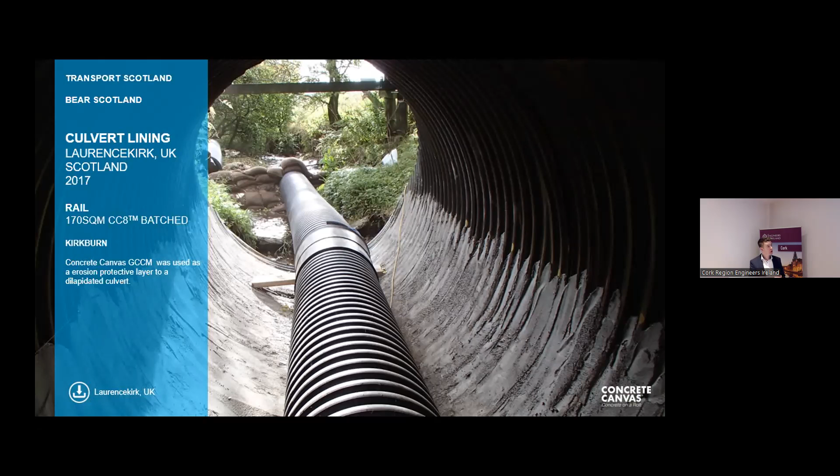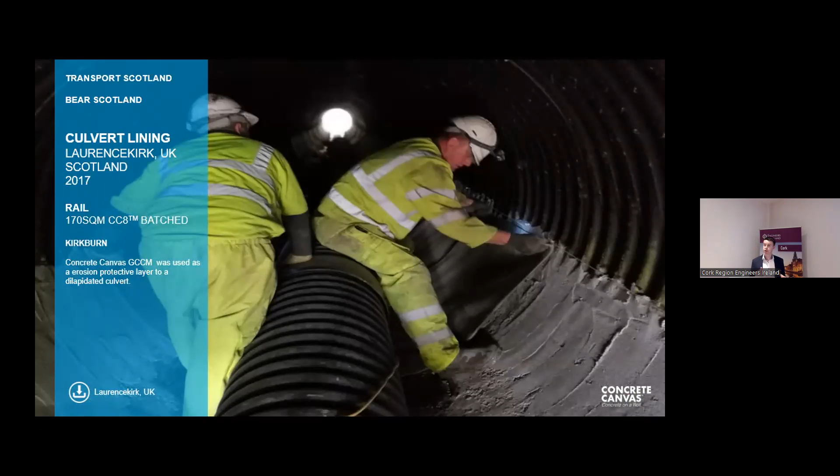Always difficult to get good photographs within a culvert, but you can see the contractor done a great job, Bear Scotland, installing the GCCM in that transverse layout across the width of the culvert. Again, fixings will change depending on the subgrade, as I mentioned earlier. On this particular scheme, it was stainless steel Tek screws with 15 millimeter washers. You'll notice in the final photograph here that they've actually grouted up the top edges of the GCCM, so if there's more flow of water than anticipated, it still prevents any water ingress at those critical points.

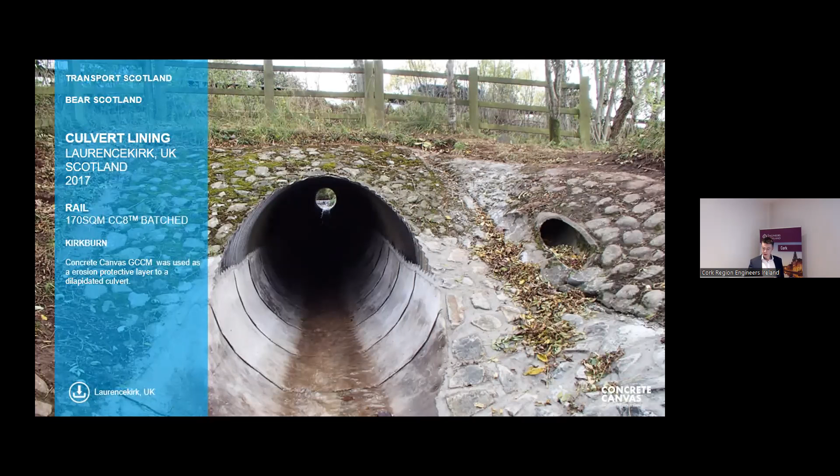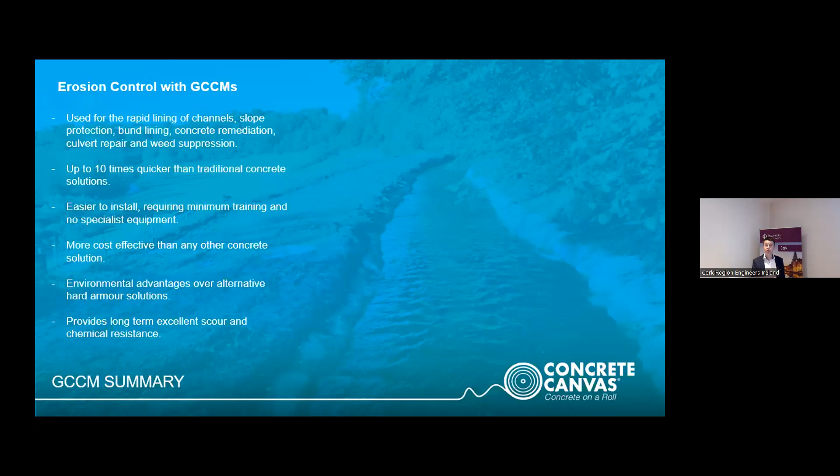I just wanted a quick summary slide, and again, if there's any questions online for Patrick, feel free to put it in the Q&A function. As I mentioned at the start, all GCCM products are designed for your non-structural erosion control or weed suppression applications. The design life of the material is 120 years, so it's designed for your long-term projects. There is some environmental advantages there over your other traditional hard armour solutions.